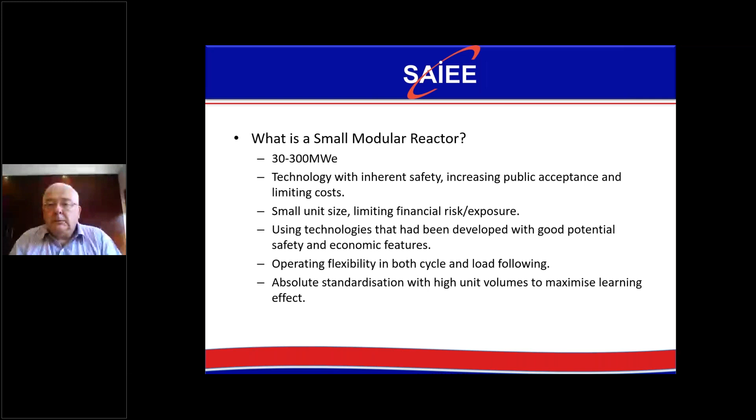So what are the features of a small modular reactor, and why are they that way? The first thing is that a lot of the developments are looking for what's called inherent safety. Not all are going that way, but that was the fundamental starting point. And the aim of that is to increase public.

Okay, I'm back again. Sorry, I appear to have disappeared for a few seconds. Apologies, you can blame probably load shedding.

And so one of the big drivers of nuclear was the increase in nuclear safety costs. Third one is small unit size. It is increasingly recognized that the mere financial risk and exposure you take by ordering a $5 or $10 billion project with a 10-year lead time is extreme. And even if the costs are slightly more, if the unit size is smaller, your exposure and your financial risk is a lot less.

What's also interesting is that, if you go back into history, in the 1950s and 60s there were many technologies out there that were developed to a certain point, but were essentially abandoned because we all went down to one design. So we've ended up going from probably a dozen different technology designs across the world, which are all very credible, down to a single one, which is the pressurized water reactor. And the reason that was chosen is a lot to do with politics, industrial policies, who had good management, who had bad management, and so on.

To put it simply, for a light water reactor, in my opinion, to get the economies of scale, you've got to have both the first machine largely completed and a firm order book with production ongoing for the next 5 or 10. Then you can start getting investors on board. The investors are very happy to invest when you get that done, but they're much less happy to invest to get there. And then lastly is just when you build it.

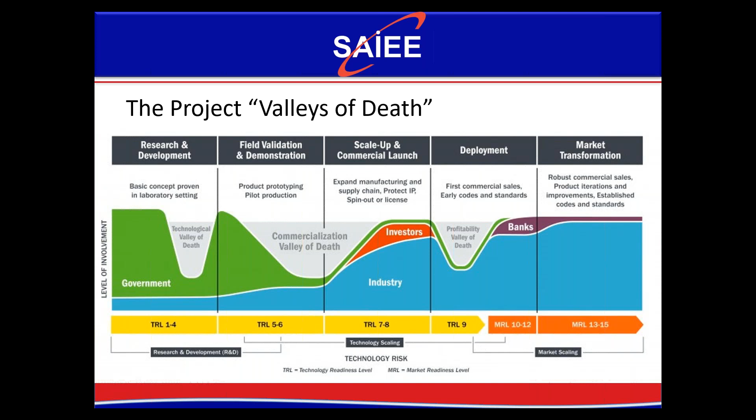What this does mean, and you'll see it in the next few slides, is that the reactors developed by countries with a very strong link between their industry and the government, clearly someone like China or Russia, are best placed to overcome that commercialization problem. And that could be the real problem, that the free market ones haven't got the depth of pocket as the developer to do all that, building the first machine.

Okay, so what are the options? I'm now going to design a light water reactor. How do I actually build one? Well, the first thing I'm going to decide is, do I have integration or distributed components? If you look at a classical reactor like Koeberg, you have got a reactor pressure vessel with the core, a pressurizer attached to it, separate pumps, 2 loops to steam generators, and all this is spread out in little components, distributed.

The initial driver for the light water reactor option is to integrate all that into one vessel. And you have certain designs I'll show in a second, which are fully in one vessel. So the one vessel becomes markedly bigger, but you end up with, in many ways, a simpler system.

One of the reasons why integration was highly fashionable, but is now becoming less fashionable, was that integration, if you look at the safety codes for nuclear reactors, you will find that it is presumed that pressure vessels do not fail, but pipes can. Therefore, making an inherently safe water-cooled reactor, if you can make the pressure vessel big enough and put everything inside it with no pipes, then you have no serious prospect of a large break LOCA, as we call them. And therefore, you've got a much better safety.

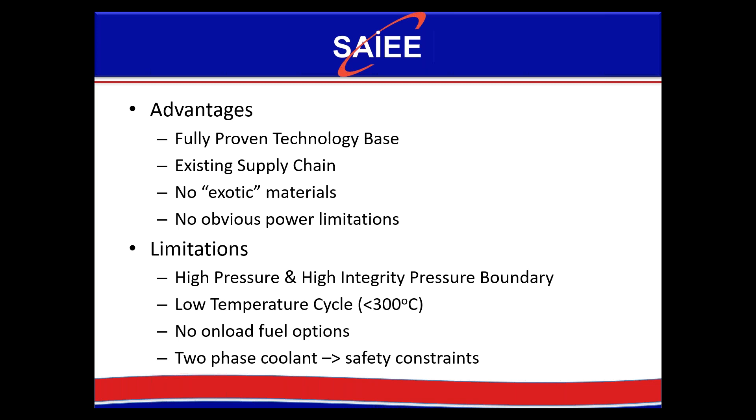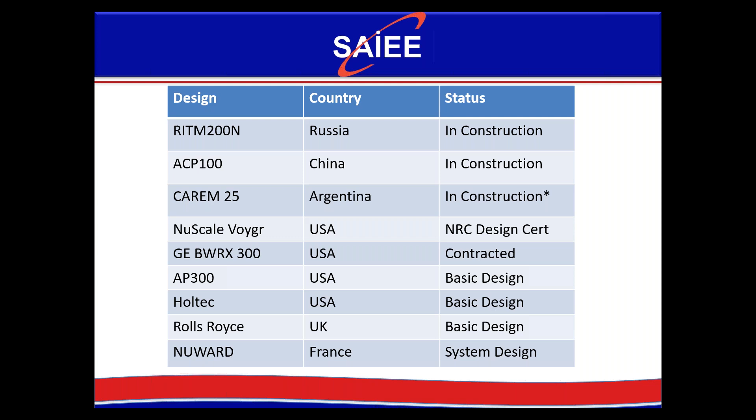I'm going to go through them one by one, and I'll try and be reasonably quick. I will comment that in many cases the information on them is quite limited. Lots of sales brochures, but actual information is limited. So let's look at the first one, RITM-200N. It's 55 megawatts electrical. It's an 8-year fuel cycle, and this is the longest fuel cycle anyone mentions.

It's in construction in Yakutia, which by the way is in far eastern Siberia, but it's based completely on an existing Russian design. It's a fully integrated machine, and it's part of an extensive small modular reactor program. The Russians have built nuclear icebreakers with very similar reactors. That's what the KLT-40S came from. They've extended it and idealized it.

The bottom left-hand corner is actually a picture of, and I can't even pronounce the name, the Russian barge that's up in far eastern Siberia and was built in St. Petersburg and then dragged round. It's easier to build the thing in St. Petersburg and drag it round to Siberia. That's got 2 reactors, I think about 35 megawatts each. It's a precursor to these.

The new icebreakers they're building have very similar machines, and the new machines coming out now are being built as standalone power plants outside the grid system. So this is by far the most advanced. If you want to go and order a small nuclear reactor today, I would suggest the Russians would take an order from you in the morning if you go and knock on their door.

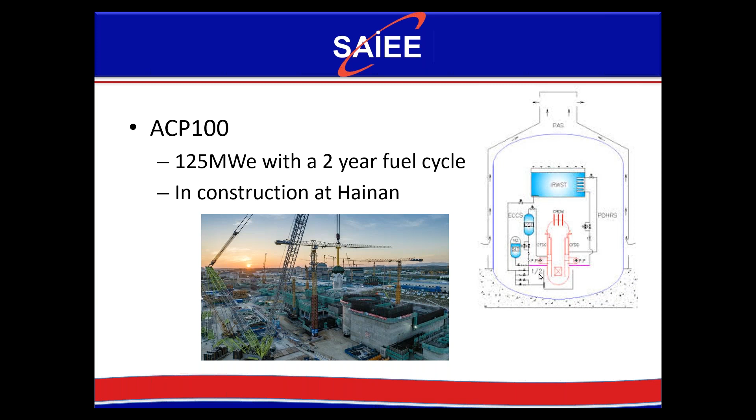There's the core, and these are the steam generators. So it's integrated, but not fully integrated like some other designs, because I think the pressurizer is outside the pressure vessel. So that's the next one. The next one under construction is the absolutely classical small modular reactor, with fully integrated steam generator and pressurizer.

It's CAREM 25, with a 1-year fuel cycle. It's in construction on the Atucha site in Argentina. The commercial version will be 120 megawatts; this is not the commercial machine, this is the proof of principle. They poured concrete in 2014, but it's been delayed extensively because of contractual problems, because not paying bills has been an issue, to put it mildly.

Standardized design. Again, the safety case is basically that the RPV will not fail, and therefore the worst you can have is a small steam line break.

Interesting discussion that the safety is based upon, if I can call it cynically, the codes and standards saying RPVs can't fail, which is true at, let's say, 1970 safety standards. If you're looking at inherent safety, you're looking at 10 to the -8, and it's difficult to prove that. So that can be a challenge for that one. But it's there, it's real, it's in construction today. There are workers on site working on that plant.

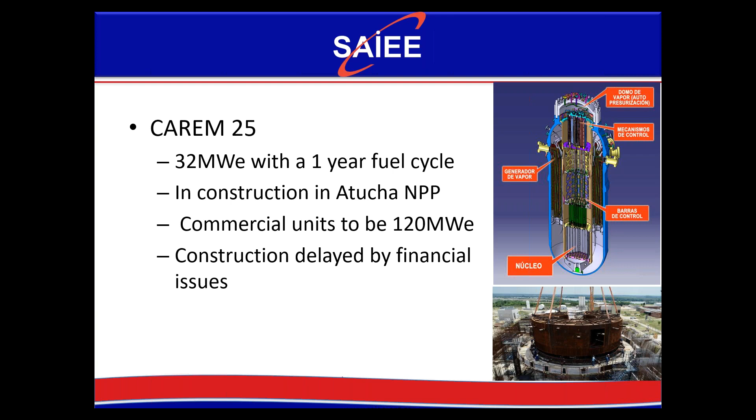But its problem, in the Valley of Death discussion I had earlier, is that with the first two I showed you, China and Russia have massive state funding backing them. And therefore, if you want to buy one, they will back you up with financing. I'm not sure Argentina can do that. So it's going to challenge this one. Okay, we've now been through all the ones. So if you're talking about water-cooled reactors, small modular reactors in construction, that's it. Everything from here on is a function of good paper.

So the next one I have brought is the NuScale VOYGR reactor. It's 77 megawatts electrical, 18-month fuel cycle. It has NRC design certification, and basically that's the reactor. You can see the reactor there. Same sort of design as the last one. You've got the fuel at the bottom. You've got essentially close to natural circulation driving the water around it. It's a very credible design, and in operation they all sit in a pool of water. So their ultimate heat sink is this big pool of water they're sitting in, in case of loss of everything else. So looks pretty good to me.

The only issue is that they had an agreement to construct the first unit, the first block of 12 in Utah, supported by some government guarantees. And the first-of-class costs started going up, and they had several other potential orders to come after the first order. Again, you know, I'll always buy number 2, but never number 1. And that first order was then cancelled because of cost issues in the States. And so they're now struggling to find another launch customer. They're talking to Romania. They're talking to Ukraine. Ukraine is signing for several reactor designs, but I'm not sure they're going to get to build them because of their other problems. But this is a very credible design.

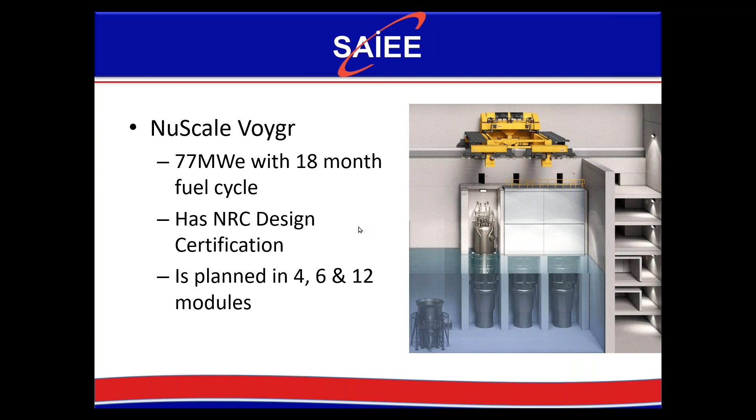Moving on. This is the odd one out in the sense that it's a boiling water reactor. You can see it's a very classical boiling water reactor. Control rods on the bottom. There's your fuel. There's your water. There's your dryers. And it's 300 megawatts with a 2-year fuel cycle. Ontario Hydro has ordered 4 units. I'm very wary of turning from ordering to actually constructing. They're clearing the site. It is a simplified BWR design. It's at the basic design stage. The first 3 I've talked about have done detailed design because they're building them. The NRC design certification requires a fairly large amount of detail in the process. This one is at the basic design level, in my opinion.

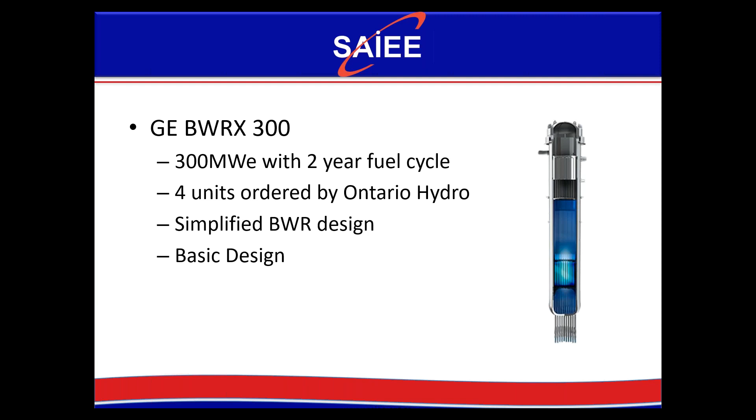It is interesting because General Electric originally had a simplified boiling water reactor, which was 600 megawatts, under the EPRI program in the 1990s, same as the AP, and that was then abandoned as being too expensive. They then went to build the ESBWR, the Economic Simplified Boiling Water Reactor, which was 1,500 megawatts, and nobody bought that one. And so now they're going back to the marketplace with a 300 megawatt version. And Ontario Hydro in Canada has ordered 4 on the Darlington site, so they're clearing ground now. Should be going forward. Very straightforward design, well understood. It's just basically a small version of a boiling water reactor with standardization.

Okay, next one, another one on the same line. Westinghouse recently announced the AP300. It's got a 4-year fuel cycle. It's got a single loop. It's basically a single loop of the AP1000 design. For those who know it, the AP1000 has 2 big steam generators and has a power level of 1,000 megawatts. Westinghouse has now announced that they're going for a 300 megawatt version of the same thing, which essentially is a single loop design.

There's the pressurizer, there's the steam generator, there's that pressure vessel that I presume is the pressurizer, and it's got the same safety systems as an AP1000. So the advantages: a system that has been fully licensed, it's been fully qualified, and therefore the design, I suspect, is at a basic level. In other words, they've got all the components defined, haven't got the manufacturing sorted out yet, but that should be straightforward because they're versions of the systems used for the AP1000.

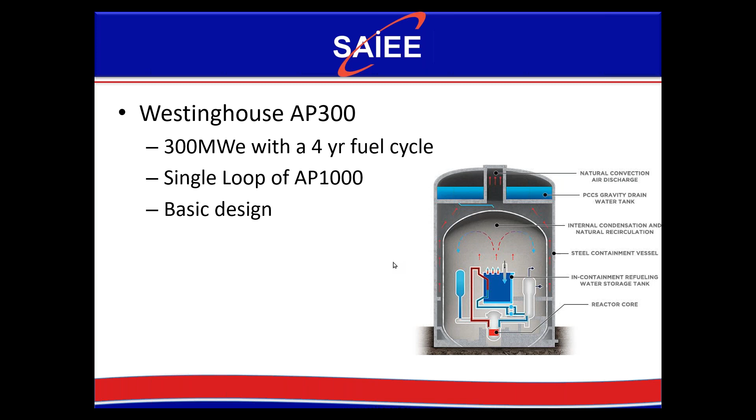And now, I would almost expect this to get bigger in due course. In other words, there's no reason not to make an AP400 where you end up with a slightly bigger SG and then it becomes bigger. Hence the fuel cycle: I suspect the core is close to the size of a standard 900 megawatt plant, which would have an 18-month fuel cycle. So you've got less power coming off and less fuel. But it's there. It's so far just been announced a few months ago, but I think it's very serious because Westinghouse is a very serious player.

Next one, also USA, Holtec. Holtec is an engineering company in the States which is extremely competent. It's doing the spent fuel casks for Koeberg. It's one of the big manufacturers in the States of spent fuel casks and things. And this design is interesting. It's a 300 megawatt design, and as you can see, it's a distributed design. Here is the pressure vessel, the fuel. Here is the steam generator with a pressurizer above it, and there's a control rod drive. It's a restructured version of a normal reactor.

It was originally planned as a 160 megawatt reactor, so the SMR 160, until about 6 months ago, and it was planned to be natural circulation. And then somebody commented that if you put pumps in the design, you increase the flow. Holtec has a very good reputation for very practical engineering, and again, they're very much a credible engineering company. They've done a lot of work, not quite as much as building a reactor.

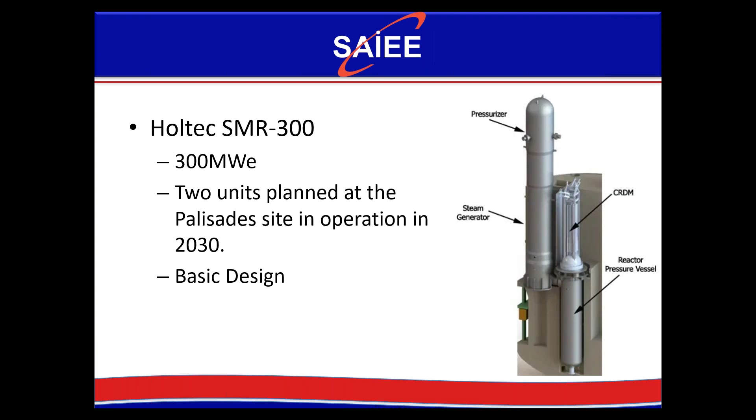What is really interesting is that they have bought the Palisades nuclear power station, which was recently shut down at end of life, and they intend to build for themselves 2 units on the Palisades site. I haven't mentioned future orders in the previous ones because I'm a bit wary of people having wishes. What's interesting is Holtec has also applied to the NRC to restart the Palisades reactor. In other words, they bought the reactor with its decommissioning fund to decommission it, and that was going to be cost effective. And now they're suggesting they should restart the Palisades reactor and build 2 more units of this on this site. It's certainly at basic design level, maybe slightly ahead of that. It's highly credible because of the company running it and because of their philosophy.

Okay, getting close towards the end of the discussion now, and then we can open for questions. The UK Rolls-Royce, and we've got no name for it, it's called the SMR. And this is the one which is not 300 megawatts, it's 470. Just a bit of background on Rolls-Royce: it is the supplier of nuclear reactors to the UK submarine fleet. So they have a lot of experience, but it's not been commercial, and they're now moving into the civil nuclear field. So clearly they understand pressurized water reactors very well. They said they were going to build a plant where the criterion is not megawatts, but every component must be shippable on the back of a lorry.

So you've ended up with a 4-loop, 470 megawatt reactor. You can see the 4 loops there, each with its own pump, with a separate pressurizer. So it's a classic, shrunk version. All the other ones are slightly clever versions, completely integrated. This is the one which is totally old school layout and being driven on a supposedly commercial basis. To be honest, this is the best. This is probably a very neat replacement for the VVER 440s in Eastern Europe, and I believe it is a highly credible machine. But again, it is one of 6 reactors, most of which are on the list already, which the UK is looking at for SMRs. Very conventional, very much a straight off the shelf machine, it's in the process of the UK GDA, the Generic Design Approval process, which is the UK version of design certification, and it's at system design level now.

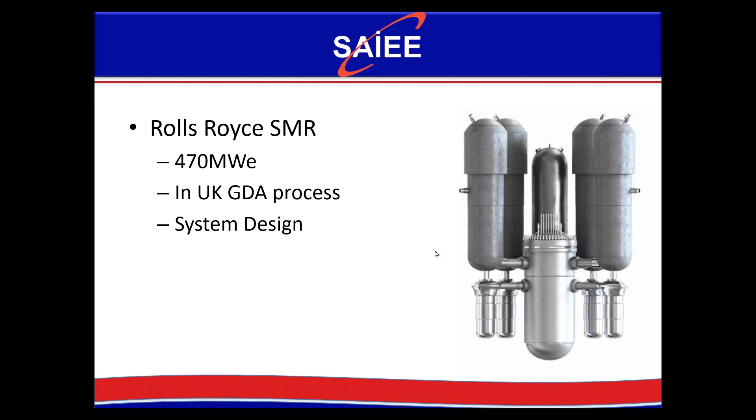But again, it's had some money crises. It's had recent things of not having the money to develop these things. Those valleys of death I said earlier, you know, getting past the hump and getting the investment. The order books come when you've proved everything. The money comes to prove everything.

Okay, my last one, and I've been going for about half an hour, so my timing is not bad. It's Nuward. This one is actually 170 megawatts electrical. The design is for 2 reactors in a pair, so 340 megawatts, but they're 170 megawatt reactors. It's at concept and system design level now in France. EDF is driving the process, with a lot of the companies involved. They've declared their target of first concrete in 2030.